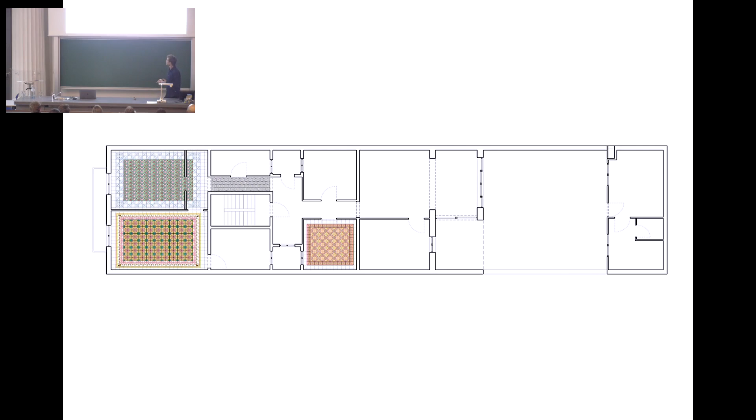We had another approach for that. Here, one of our first commissions, we decided to open the space and improve the relation between the courtyard and the street. So we opened all this by opening these walls, opened this structure, and tried to connect this place - the workshop. This is a place for a musician who used to work and live in the same place. So we tried to improve the idea of working and having the connection with the street. It's not only the visual connection, it's the air - air facilities and cross ventilation, and the idea of living in the exterior, which you can do in Barcelona from March until October or November.

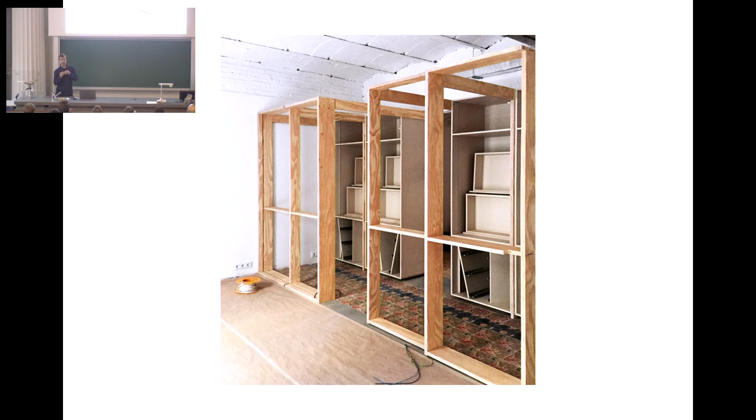Actually, one of the most difficult seasons is summer, so we did these kinds of operations. We started by opening this new courtyard, creating a sequence of different spaces which were not defined by a domestic program. We just proposed a collection of rooms linked to the exterior spaces, so from the interior we could see the exterior, see the street. Then we introduced all the new program of the house - storage, or even this new structure for a pergola and a staircase to go up to the garden on the roof.

We propose that as a piece of furniture, a different element with different material from the pre-existent - this idea of permeability, of sequence, of living in an intermediate place between the exterior, the street, and the courtyard. These are some pictures of the place. Also greenery and vegetation is very important for us because it helps reduce temperature, creates shadows, creates a healthy comfort environment. And this idea of placing the kitchen - it's maybe the only thing we usually place that doesn't move. The rest of the house is just an open space.

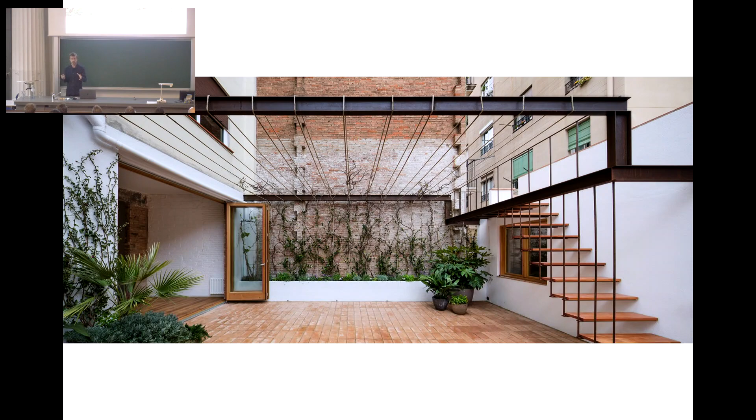So as I mentioned, the most important room for us is this - the exterior room that we improve. We always try to improve these spaces. In this case, with a really light structure, with ropes and vegetation, that has a green cover in summer, and in winter it permits the sun to go through.

With the same idea of subtracting and adding, we did quite a lot of competitions these last years, and we were quite lucky that we won some competitions.

We are actually building some of the work that we have won over the last years. This one was in the center of Barcelona, in the Gothic quarter, the Gothic district. This place here was a former house, a common housing complex, but it was catalogued as heritage, because it was in front of this Josep Lluís Sert health center. This is a very important architect, Josep Lluís Sert, a Catalan architect. And this place, since it was in front of the famous building, it was catalogued.

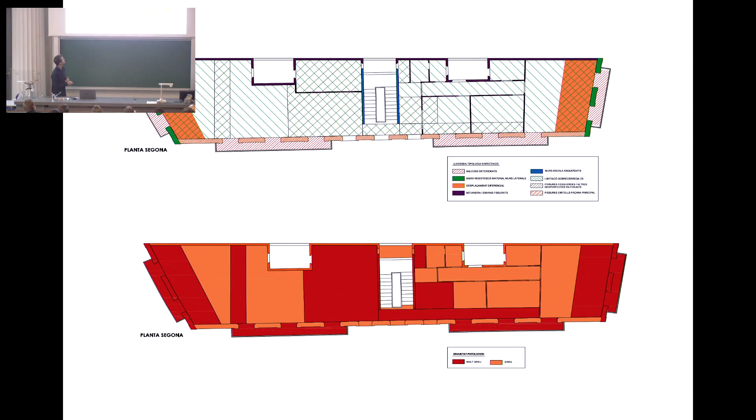But on the brief of the competition, they said that this building should be demolished and it should be a new building for a music school, but we had to preserve the main facade. For us, it was something stupid, because if we have to demolish a building and have to maintain a facade like a landmark, we don't really think that's heritage, we don't think that's a good approach. It doesn't make any sense to just destroy the building and keep one wall, which is quite tall, quite difficult. You need a structure for that purpose. So we were really critical with the brief of the competition.

They gave us all these plannings that said this place was in danger, in a bad situation and was going to be demolished, so it had no kind of interest. But then we proposed to maintain the 3 facades, which explained the former volume of the housing, and then we decided to maintain some of the original structures in order to keep those 3 facades.

Instead of demolishing the whole building and just maintaining the principal facade, we proposed a singular void in the central part, in order to introduce new facilities - staircase, elevator, bathrooms, etc. So at the end, we proposed to combine 2 structures: the old structure, with Catalan vault, ceramics, and metal beams, etc.

And then we proposed to introduce a wooden structure, a CLT structure, which is a light structure. It doesn't need to increase the foundations of the building, which in Barcelona is a good thing, because in the Gothic center we have a lot of archaeology, so it's important to think about the weight of the buildings.

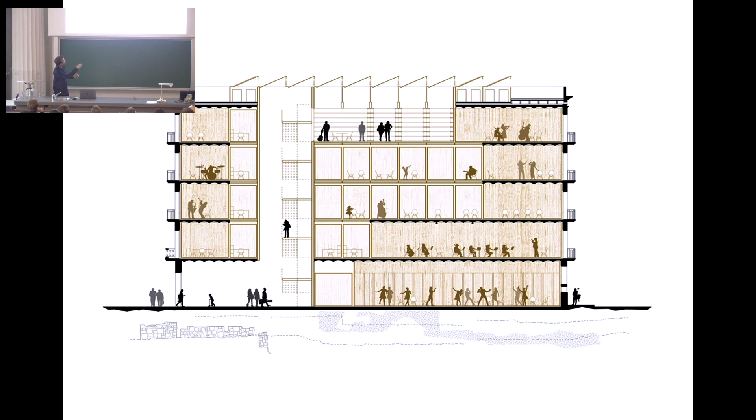And we decided to remove the central part, and we proposed all these small boxes that were maybe just supporting this program for a music school, for small classrooms, but in the future they could be taken out, and then we could have these big spaces. This was the main idea of the project.

Of course, we had this new staircase that works as a courtyard, and it provides the lighting, the air, the cross ventilation. And then another strategy, the second strategy, was to separate a little bit from the street, because since it was a music school in a very popular neighborhood, we decided to locate the rooms in this intermediate space.

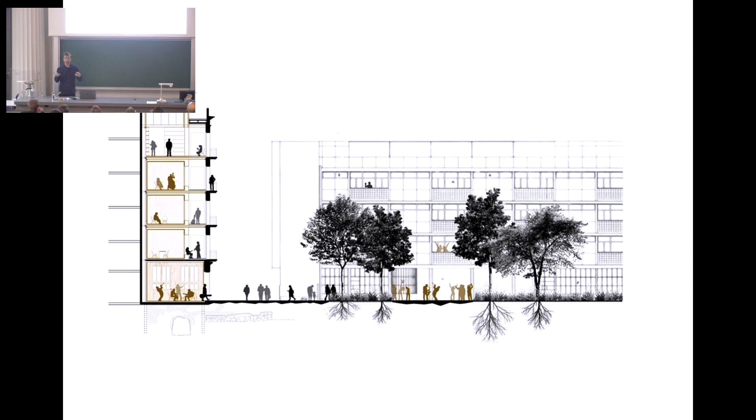We separated a little bit from the neighbors in order to not impact the former structure, and to have some space for facilities. And then this space works as a gallery, as a common space, as a street, in every floor.

So with this strategy of box in a box, putting new wooden boxes inside a ceramic box, we obtain these in-between spaces that really transform the building, because they transform a single room into a public space in the building. Of course, reusing the pavement and recovering the walls, the bricks, etc.

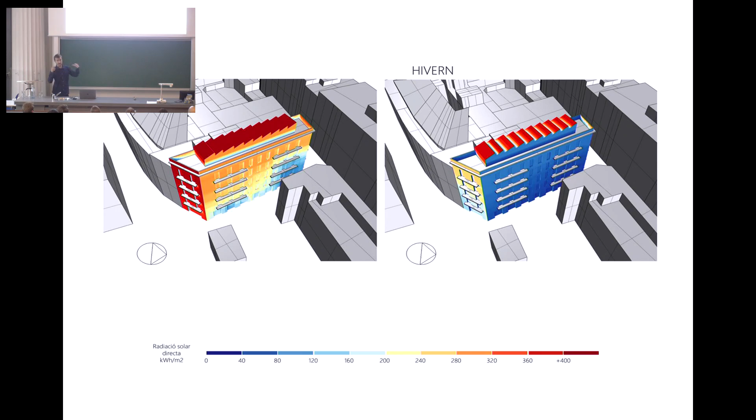And then we are very conscious of the heating and the temperature in summer and in winter, in this Gothic Raval - there are very narrow streets. You almost cannot have heating in winter. So we proposed to have a heating roof, like a skylight, a big skylight, in order to get all this sun heating in winter, to reduce the need of heating in the school.

And in summer we shade these glasses, we shade the skylights. And then since this place is hotter than this one, air goes up, for thermodynamic logic. So this strategy helps to improve the bioclimatic behavior of the building.

And these are some images of this top floor. We did a trick here, because this was supposed to be a library, but in Barcelona, in Spain, the regulations are really hard.

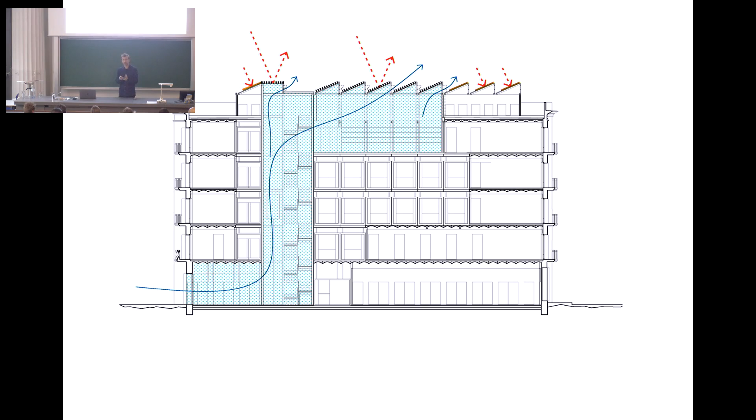So a library needs air conditioning and a lot of things, and we decided not to call that a library, but a place to read. We just change names so they cannot object, because a place to read is nothing—it's a place where you have books and you can read, but then we could improve this as a bioclimatic space. We really like to do that kind of tricks.

This is the first phase of the building. We won a competition and we were really happy because they appreciated this idea of saving the building, which was going to be demolished. The first phase, as happens a lot in Barcelona—you win a competition, three years later you deliver the project, three years later, if you're lucky, you start the work, and maybe three years later you finish it. So it takes about 6, 7, 8, 9 years. You have to be very patient in Barcelona if you want to be an architect.

But we have a problem with squatters in Barcelona, because we have a lot of empty buildings, and if squatters get inside and spend 1 or 2 days—I think it's 48 hours—there's no law that can get them out. So for public buildings it's a real issue. Barcelona municipality does an operation called an inhabilitation process, taking out some parts of the building to prepare it for future works. So this project is about taking out these slabs and parts of the building, but we could maintain the main structures and facades we imagined in the competition.

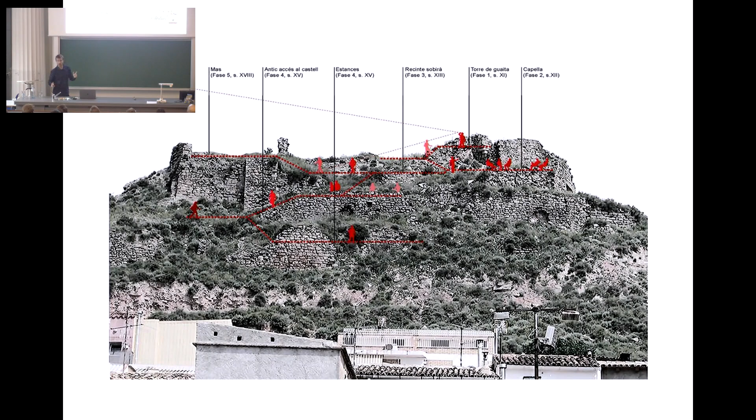Two years later, in 2017, we had the first commission to do the first intervention in this castle. We had a great budget of 30,000 euros—not our salary, for the work. So for 30,000 euros we had to do something.

We thought, okay, we're going to work with the archaeologist, not after the archaeologist—usually the archaeologists go first, do the earth movement, find the structures, and then the architect comes. We decided to work with the archaeologist and reuse all the material, the earth, found in the excavation. So while the archaeologists were recovering the castle, we were constructing platforms to improve accessibility to the castle.

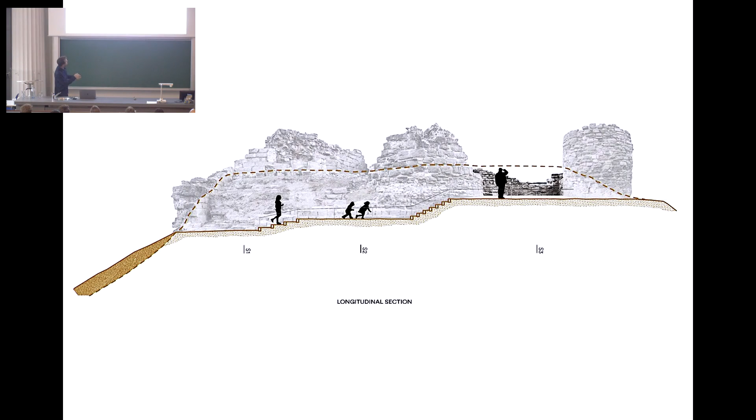It was really fun because there was no residual material—we didn't drop anything. We just took out the earth and put it there. We did this excavation and created a passage to the topmost point of Jorba's castle, with the idea of recovering the point of view.

Because for us, recovering heritage is not recovering a shape, a form, or a material—it's recovering an experience. And this experience is a place, like a viewpoint, a place to look at the territory.

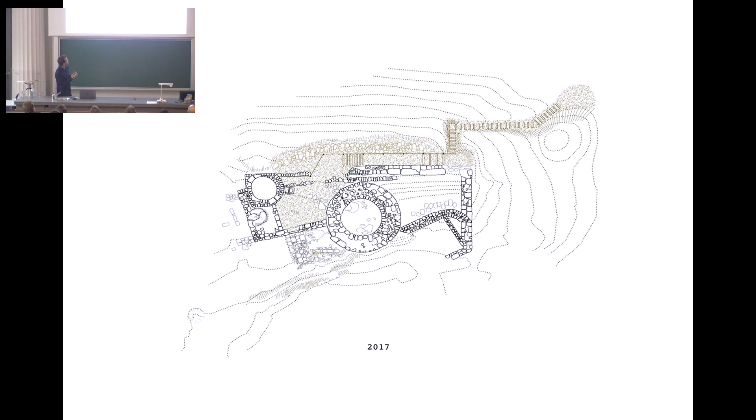All these rocks are material we found in the excavation that we left there for the future. So with these high-tech details, and with a lot of energy and a lot of visits, trying to engage the constructor and the promoter and everyone, finally we could do this. It was really minimal work, but for us it's one of our favorite projects, because at the end we reached almost the first image. It was almost invisible, the intervention—just a staircase to allow people to get into the top part.

So at the end there are five parts. The first parts are almost underground, only 60 centimeters. Then we go up, we face the castle, we turn around, and it amplifies a little bit. Then we go up and finish here. We finished here in 2017.

Two or three years later, we had the opportunity to continue this project. This is interesting because we did this master plan in 2015, then in 2017 we did this first intervention, and two or three years later we had the opportunity to continue this idea. So at the end, this idea of working in phases helps us to think.

It helps us improve things and understand the meaning of time in our work, in terms of this heritage. In this case we were surprised because in this excavation we found a structure of an old church. There were some important drawings from the 17th century, and the archaeologists told us there were interesting works here—they told us to think about a structure to keep this place from water.

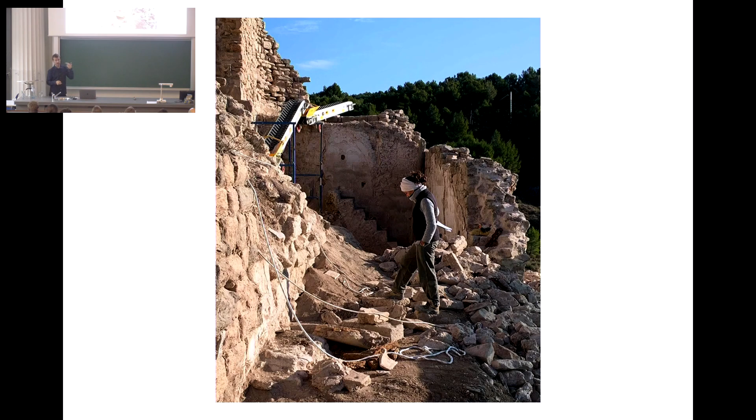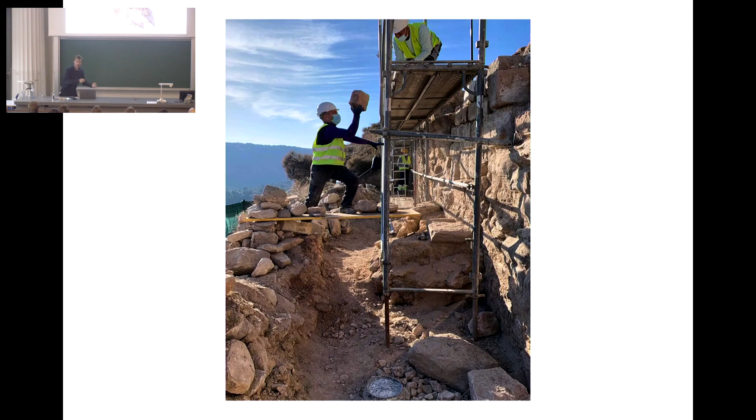We had to redo the whole project because we had to maintain the same budget—we didn't have more money—and we had to invent a roof to try to preserve this place from water. So we decided to work again with the materials of the place, with rocks, with earth. We did this cyclopean wall to stay within budget and not waste time or effort placing things. We just replaced the rocks. We did this wall in order to do this topography.

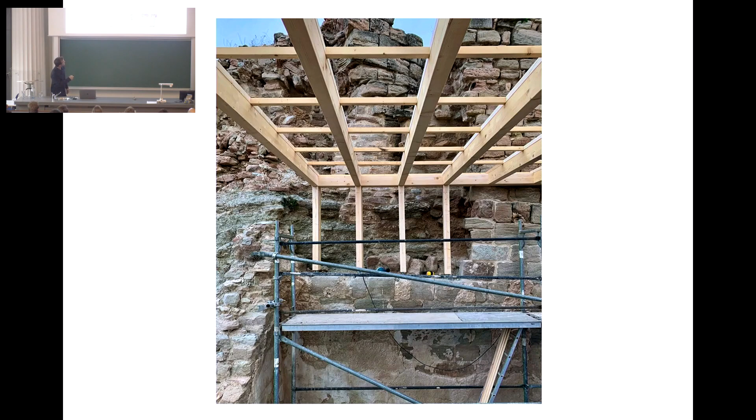Then we proposed this light cover, this light structure that is reversible. In the future, if they don't like it or need something else, it can be taken out because it almost doesn't touch the former structure, but it helps to finish this second phase. Actually, it really finishes our first idea about this transition through history.

This structure is also a landmark—something that from the distance, you recognize that something has happened there. Then you see the former height of the castle. And of course, it is a new layer, a new layer that explains this new intervention, and it was really precise work.

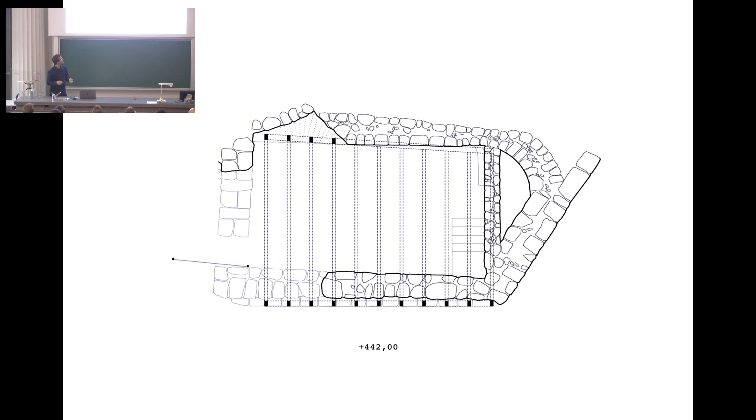By taking care of all these wooden beams in place, we then placed this polycarbonate cover because we didn't have any artificial light, so we had to work with a translucent material in order to have light inside to see the paintings and all this material. This place is something that we found and then transformed—so it's a new place, another place.

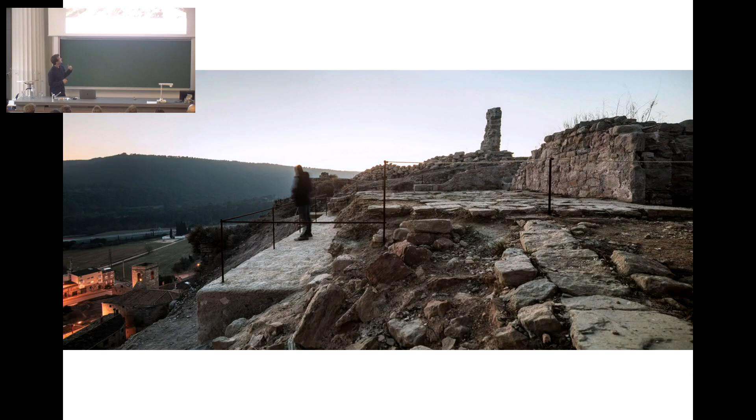This is the detail of the pillars that they don't touch, the former foundation. For us, the most important space in this project is this one, because at the end we finally achieved our goal, which was to relink history with the landscape, to recover this point of view.

The second group of projects deals with this idea of climate, or bioclimatic shelters as we call them. Of course all the projects could fit different categories, but this one will be fast because we've only been working on it for 2 or 3 weeks. It's quite new, but I wanted to share it because it's another kind of intervention, in a public space, a park, which was planted with pine trees in the 60s.

These trees are now old. This place is quite dry. We have a problem in Barcelona, it doesn't rain. So this place could really be a climatic shelter, but it doesn't work. So we won a competition to transform this place, to improve it as a climate refuge. This is a name they are using in Barcelona's metropolitan area for this kind of climate refuge.

Just improving the environmental condition of an existing place. So what we do here is understand the pre-existence, which was this road, a pedestrian road that was informal. Then we just placed a surface, a platform, through earth movement, and the most important thing is that we put a water pan here, in the lowest part of the topography, so all the water will come and drain here.

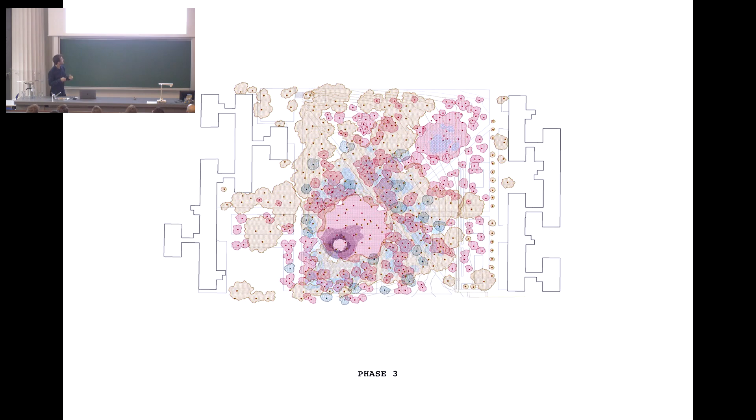And then we were going to plant some new species. This is like an evolution of the idea. Now we only have one kind of tree, these pines, so they always have the same kind of shadow all year. Since some of them are old, we propose a sequence of changing some trees and introducing diversity, biodiversity, and water, in order to improve the thermal conditions of this place, understanding that this could be a climate shelter.

But this project is also about understanding how to introduce a place into an existing space. And we're working lately with this idea of very defined geometric enclosures.

This project that Tina mentioned is one we're developing right now. It's under construction, it will end maybe in 3 or 4 months, hopefully. It's in Palma de Mallorca, really close to the airport, which is a problem acoustically, and close to a road, also a problem acoustically. The plot was a pretty bad plot, really hard. I don't know exactly why we entered this competition, because the conditions were horrible.

But this promoter is very interesting. If you saw the last sketch, it's Ibavi. I think it's one of the best promoters in Spain, maybe in Europe. It's a promoter really committed to recovering traditional materials.

These dwellings don't have any kind of heating system, zero. They are bioclimatic, because in Mallorca, in the Balearics, the weather is even better than in Barcelona or Catalonia. In summer it's a challenge, since they don't have air conditioning either, so they have nothing except hot water, nothing else. So this is an idea of reducing, of trying to go back to the main issues of life, of construction.

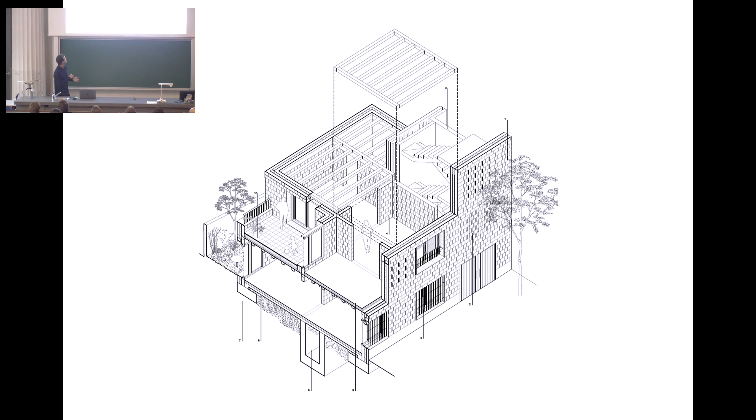With this idea of separating from the party walls and creating these things, all the dwellings had to open, had to have windows onto the street - this is not a regulation dimension for opening windows, we put that in for quality. We can use these patios, but we had to place all the dwellings on the street perimeter.

And then as the building grows, it fractions, and it allows this kind of terraces. We have 11 dwellings, 5 on the ground floor, and this is quite interesting because these dwellings come like this, and then like this and this one - some kind of this shape.

And then they have this staircase, which is a private staircase for everyone, and it works again as a heat - like a chimney - and of course it gets some heat from the good orientation.

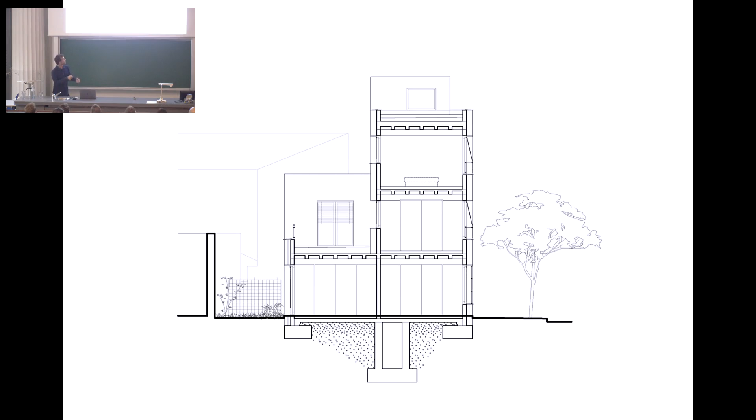And then we had this thing because the plot was really bad, and we had to put some kind of inside gallery to place facilities, and we use this to move cool air, to exchange the air of the dwellings through this underground corridor.

The dwellings are quite different. This is the typical one on the ground floor, which is very simple - we have all the facilities here and then this courtyard.

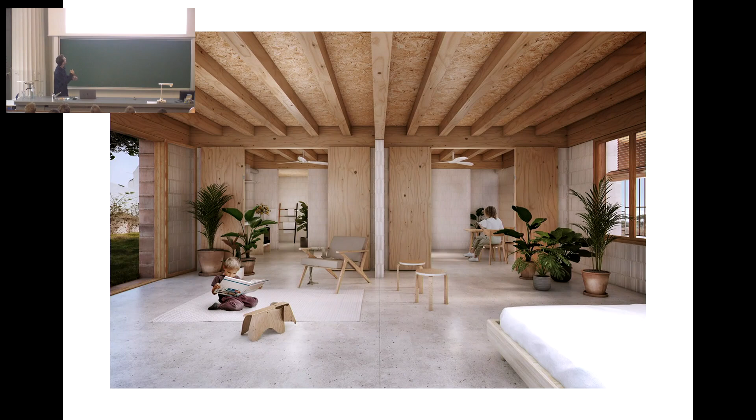But most of them are different because they are adapting to the place, to the pre-existence, and they have different situations like terraces - this one is quite big, has cross ventilation. And these are some pictures of the construction.

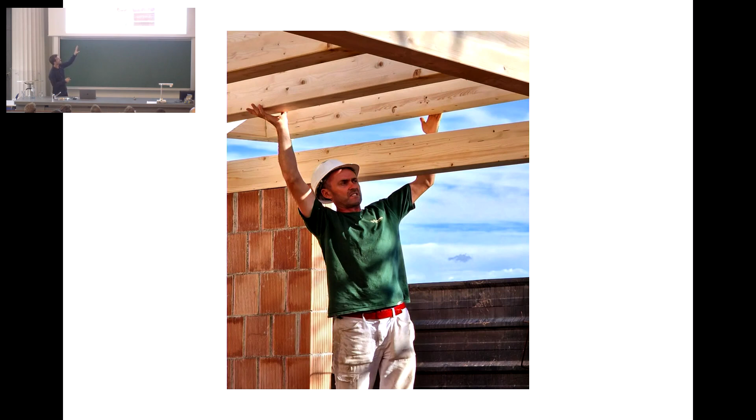Using this local brick, always trying to improve this idea of the house we saw at the beginning - this idea of cross ventilation, cross views, and prefabricated wooden slabs, which help save time. So this idea of working and improving the two technologies together.

Without any kind of support - just the wood supporting wood, no metal things, nothing, just by its own weight.

And of course, one of the dwellings will have this surprise in the patio - they will have this rock, which I think is really nice, really interesting, because it's geological history. It's quite narrow, but I think they will find a good place to put a table, and they will start a good relation with this rock and with the history of the place.

Another project, finishing this second part. It's a single family house in the north of Barcelona, near the place that we went to see to start the journey - the Turó de la Rovira, in these bunkers. This is the Tres Turons, Turó de la Rovira.

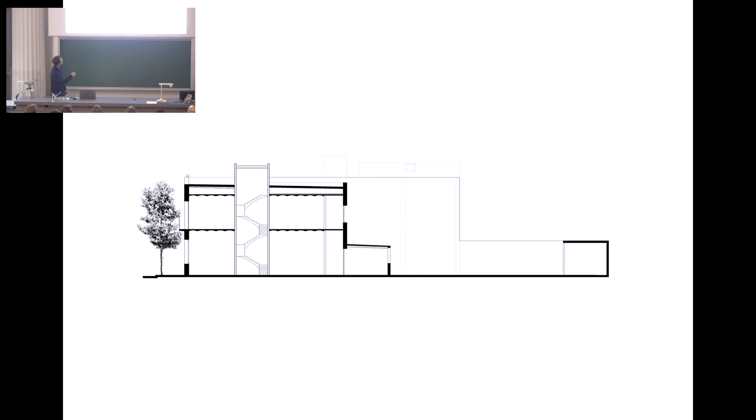This was a former house from the beginning of the 20th century, which had - again - this facade was catalogued. But the house had a lot of renovations and a lot of issues that weren't quite interesting.

So we decided on this strategy: remove some part of the house, the newer or latest part of it, and reuse all this material as a sustainable draining material in the courtyard, and introduce a new wooden structure in order to increase the surface area.

And in between the two structures - the old, heavy, inertia structure, and the light wooden structure - we had a patio, a vertical courtyard. We placed the staircase there, and all the services and facilities, the kitchen and bathrooms. So at the end, this is the idea of combining the past and the future, the past and the present, and the joint.

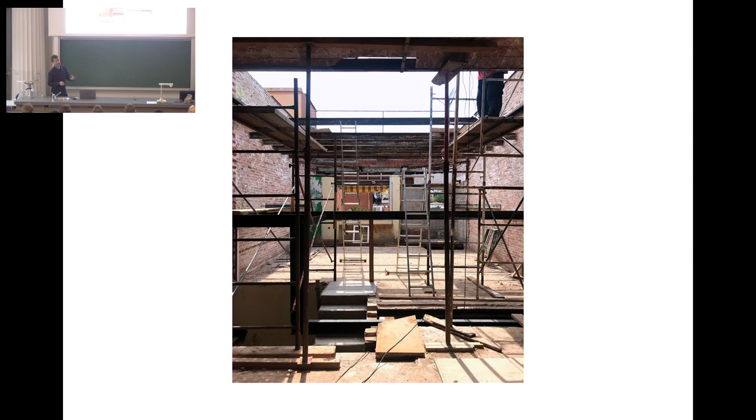It's an empty space that helps to improve the bioclimatic conditions of the house. This hall works like a patio, helping all rooms have cross ventilation, which is very important in Barcelona because in summer it's hot with a lot of humidity. Opening here and here, all rooms get cross ventilation. When this place is open, everything works as one singular, big space.

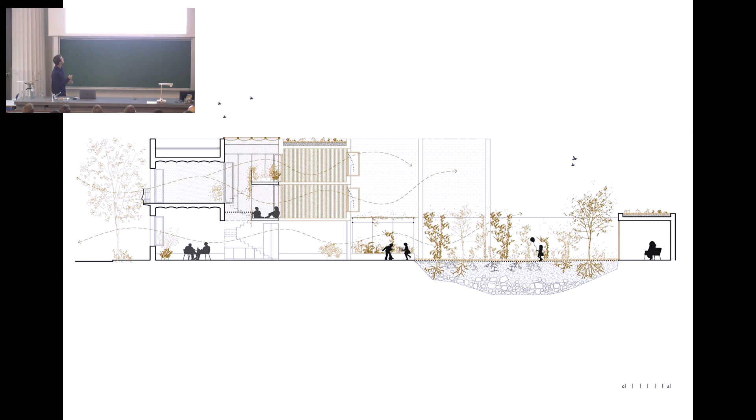This idea of vegetation works again as a climate conditioner, like a climate pergola. Of course, the passage of time always improves the projects. Going up, taking care of this idea of ventilation, like an Egyptian house that works vertically, we have this.

This place is like a winter garden, a glass house inside the house. In winter we can close it and it works like a heat condenser, but in summer we open it and everything works as a single space.

The new rooms, which we had to add on this new floor in order to achieve the surface area and the program, we needed more rooms. They are made of wood, so as not to increase the weight of the house.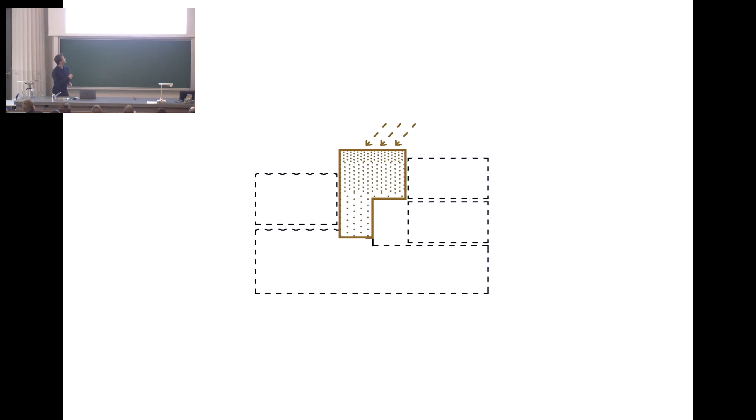This idea of understanding the two situations of the house: in winter we have these compact rooms, in summer we have all this open situation. Then there's this greenhouse that works like a greenhouse in winter, and in summer it works like a chimney.

Let's move to the third part of the lecture, which is another scale, meaning linking landscapes as well, these ideas of understanding. As you see, all the projects are about connecting spaces, connecting climates, connecting exterior and interior, connecting past and future. This is a project we are developing at this moment.

Our group visited it from the exterior, so we couldn't see anything, but now we have improved the works a little bit. This was a competition we won two years ago. It was a really funny competition because it was for the building of a fireman practice tower. It's a strange typology.

Firemen in Catalonia, since there are a lot of fires, need a tower that simulates different parts of different buildings. So they need a lot of different staircases, balconies, and different kinds of windows. They climb, they jump - this is a very singular typology.

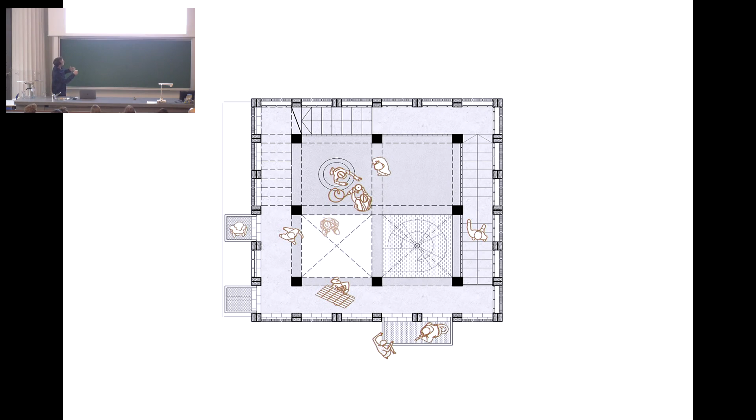So in this case, we propose this heavy structure because they need it for the activity. And with this section, which is really nice, really interesting, really crazy, there's a lot of dangers inside the building. Like 3 stories, jumping, climbing here, going down, like a well inside here, okay?

It's a really interesting project. Actually we won the competition and now we are building this piece. And we had some problems, some surprises, because in the competition we didn't have this information. They told us, no, let's go make a tower. And here we had a lot of work to improve the foundations of this tower. So that's a trick they didn't tell us at the beginning.

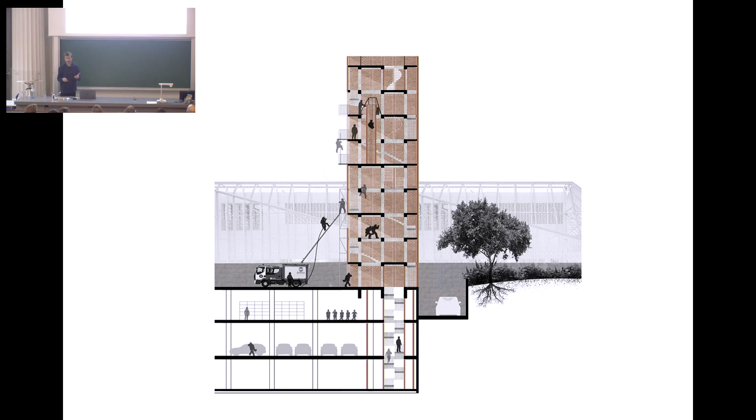But I think we have improved that, and now we are already in the second floor. So we are okay, and it's going up. It's very nice because you can see the future of this, the future spaces and this vertical connection, all these small corridors.

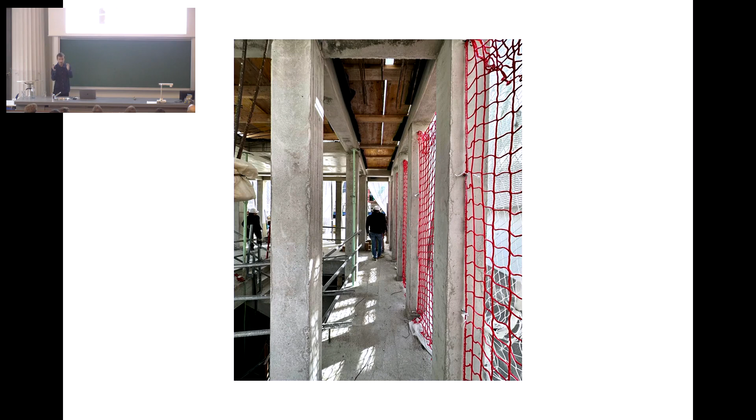The firemen are really happy when they go to the site work. They think it really relates to the buildings in Barcelona. In Barcelona, you have buildings in the Gothic center which are very small, with very small corridors, and then big spaces in Eixample. So this tower creates all this kind of situation. It's a very interesting project.

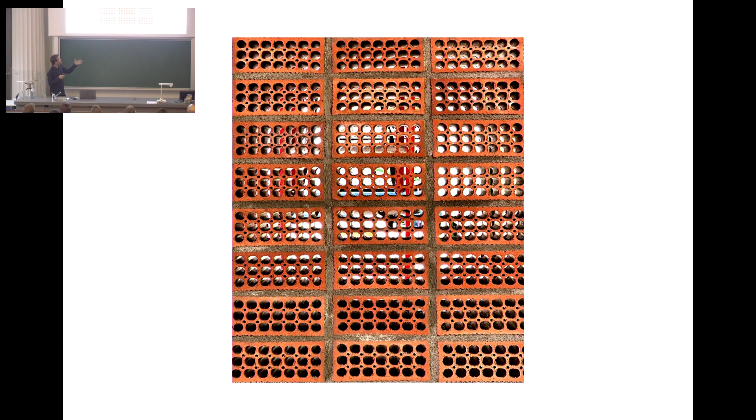This is the facade. We work with bricks, and we put them on this side in order to have wind, ventilation, all year. Because at the end, this building won't have any kind of installation, any heating or cooling, nothing. And the firemen wear a lot of clothes in summer. So we needed a building which breathes, which ventilates the whole year.

Now, this is a project related to our course that we are doing with Elisabetta, water trails. Actually this is a water trail, Rec Comtal. This project nowadays, if you look at the newspapers in Barcelona, is very important because we have a problem with dry season. It didn't rain in Barcelona for the last 3 or 4 months. And ACA, the agency of water in Catalonia, is thinking about taking the water from this Rec Comtal to get like a reserve of water.

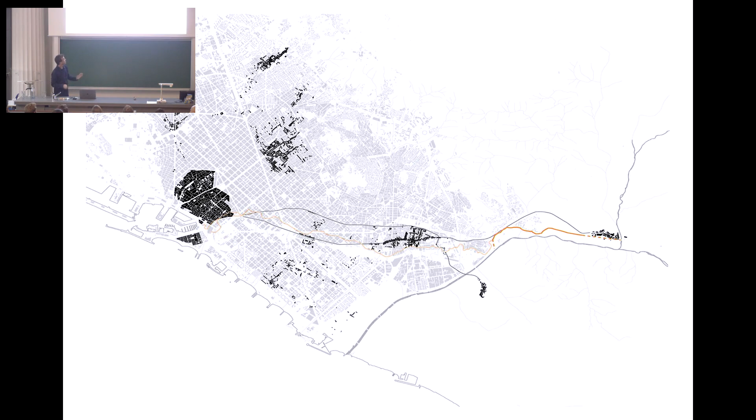In 2013, we won our first Europan in Barcelona. Europan is a competition for young architects. Usually when you win, you won't get any kind of commission nowadays. Formerly you'd get commissions to build something, but not nowadays, at least in Catalonia, in Barcelona.

When we win, we have won 3 Europans, we didn't get any kind of commission from the competition. But in this case, we were asked to think about doing something in Rec Comtal. That was our prize for Europan after winning the competition.

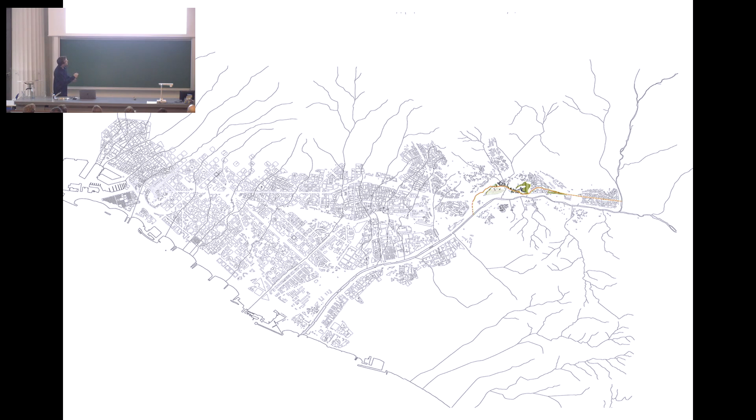We started to analyze Rec Comtal, and we decided that Rec Comtal was not only about one place, one intervention here—it should be an intervention for the whole city. We explained that Rec Comtal is not an intervention just to recover an archaeological site or a place. We have to recover Rec Comtal as a heritage resource: water. We have to reintroduce water in the city, or at least reintroduce permeable conditions in the public space.

We localized 25 possible situations at the beginning where we could introduce these kinds of strategic environmental conditions, crossed by these water streams. This was in 2015, almost 8 years ago.

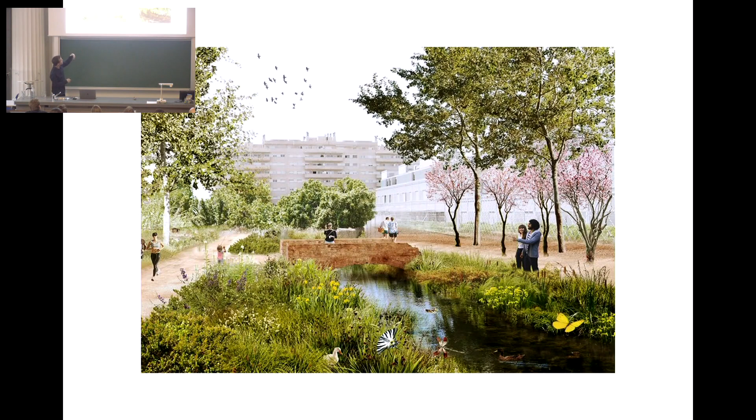So we have these different situations. Where we still have water, we can improve conditions, making a nice place with animals. Where we already don't have water but still have the trace, we could improve this as just a permeable trace. And in the center of Barcelona, maybe it's only pavement, but pavement allows water.

So we propose this kind of strategy to create continuity through Rec Comtal, allowing people to cross through all these neighborhoods and reconnect the center of Barcelona with Vallbona, the poorest neighborhood in the city. No one cared about Vallbona. Nowadays, yes, because of Rec Comtal, but it's almost outside the city.

So this was like the master plan. One thing about our studio is that sometimes we invent a lot of projects, we invent a lot of work. When we win a competition, we change the idea of the competition. When we have a commission, we try to change the commission. And I don't know why, but we ended up finally receiving this commission for a master plan.

We were only supposed to do a commission for a single place, like a park, and then we were asked to do this master plan. This master plan took almost 5 years. Then last year, we had the first commission to do an intervention in Rec Comtal itself—an intervention exactly in the Rec Comtal.

Rec Comtal, in this place, is like an abandoned, residual space. People were even swimming here, and some kids got trapped inside, causing some social issues. So they asked us to think about some kind of intervention that would keep people from the water, in order to preserve it, but also for security reasons.

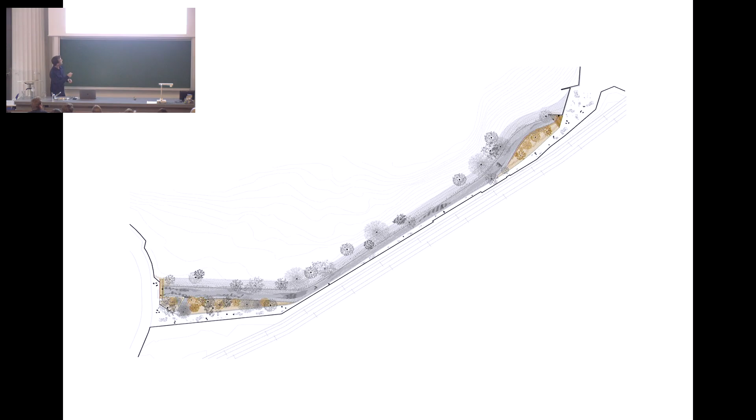So we decided to work with the idea of 2 points that served as a pilot intervention for the rest of Rec Comtal—2 points that were like landscape points, also like viewpoints. These were the places where you could see the water, standing in front of it, outside the water, but still seeing it.

Along this road, we planted a lot of vegetation to improve the quality of the water, to make shadow, and to reduce the temperature. So these are the points where you can be in touch or connect with the water, and the rest is just nature. We have to start thinking that people can't be everywhere—we have to separate nature, define which is the place for people and which is the place for nature, because nature, at the end, is our future.

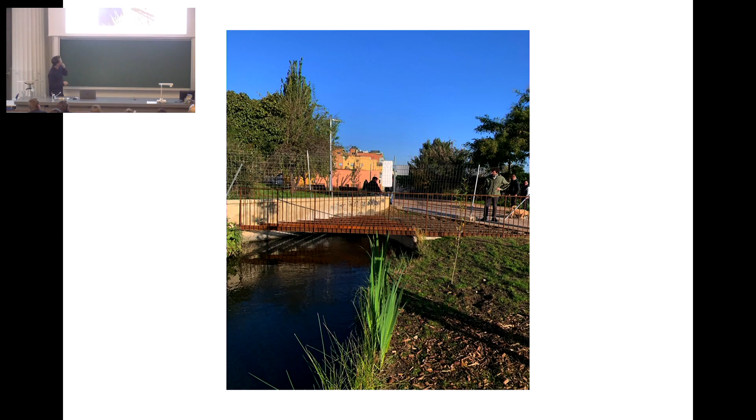People really go there, and they become familiarized with these new points of Rec Comtal. On the other side, we had existing infrastructure overlaid on Rec Comtal, so we decided to place our structure as another overlay, in front of and over this existing structure, like a balcony over Rec Comtal.

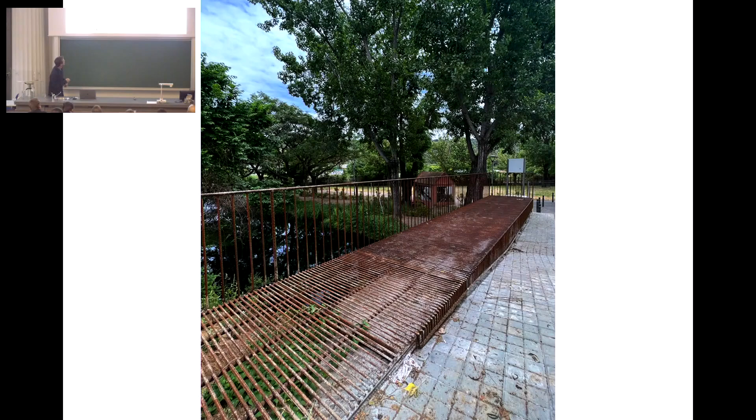The commission was for a handrail, and we proposed this idea of a balcony instead. It's related to the context, and you can enjoy the water and the biodiversity of the place.

These are pictures from last Sunday when I went with my family, and this place is now fantastic. We planted species here that keep people from the water, and we introduced some new species of fish, working with biologists and specialists. We don't know anything about fish, we know about bricks, but I think the fish is more interesting than the brick.

So it's quite nice to see that the work, one year or some months later, is starting to have its own life.

Now this project, the Tower of Merola - I think I've already explained the main ideas of our work. This project has the same idea as the lookouts in Rec Comtal, but with another condition.

The condition is that this was an old tower from the 13th century, with the highest catalog definition of heritage in Spain. In 2015 it was about to fall down - it had suffered a lot of earthquakes, and actually one year later, in 2016, it was about to disappear.

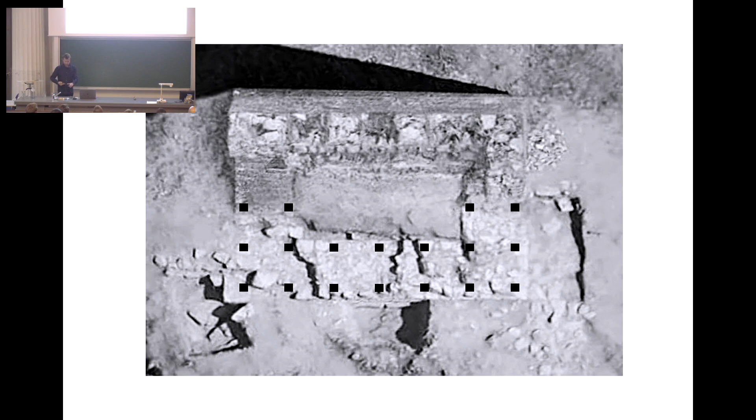We saw the plan of the tower, which is very small, 3 by 5 meters. We proposed to recover the structure with 14-centimeter wooden pillars, columns, that would recover the original trace of the tower, and we were allowed to place a staircase for maintenance reasons.

We said it was for maintenance reasons, but the truth is it was for tourist visits and experience, not just to climb to the high part.

So this tower again follows the same idea as the other projects: the pre-existence and the new structure, a light structure using another technique. In the middle there's a void space where we place a staircase.

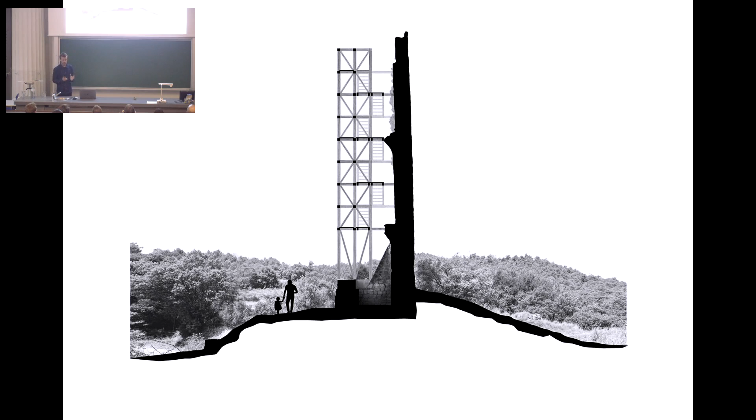We wanted to maintain this idea of the tower, of the ruin, because it was really powerful, so we didn't want to reconstruct it. We wanted to add another structure which is clearly different but still related - related maybe to the original levels, but using another technique.

We had to do all this work of placing and overlaying these two structures, which was very interesting - taking a structure from the 13th century and adding another very clear, great structure that really matches everything. So when they built this originally, they knew what they were doing.

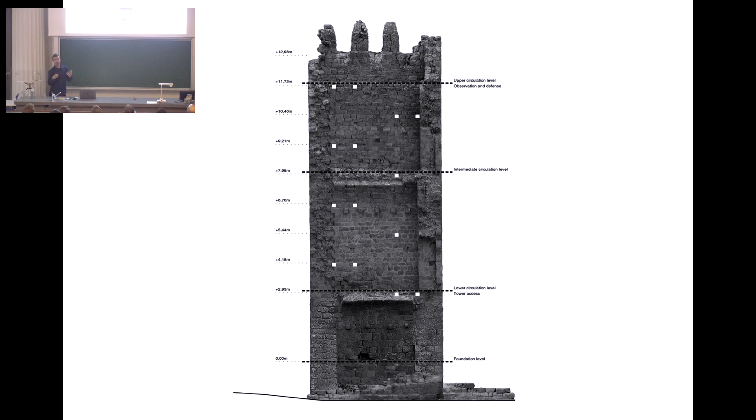We placed the staircase inside, and we have 14 points that help stabilize between the two structures. Of course, if there's another earthquake, maybe everything will fall down, but in terms of wind, I think we are safe at this moment.

For us, recovering the tower was not only about the monument itself, it was the whole place - the experience of getting through the tower, getting up, and getting linked to the landscape. This is the most important part of the project.

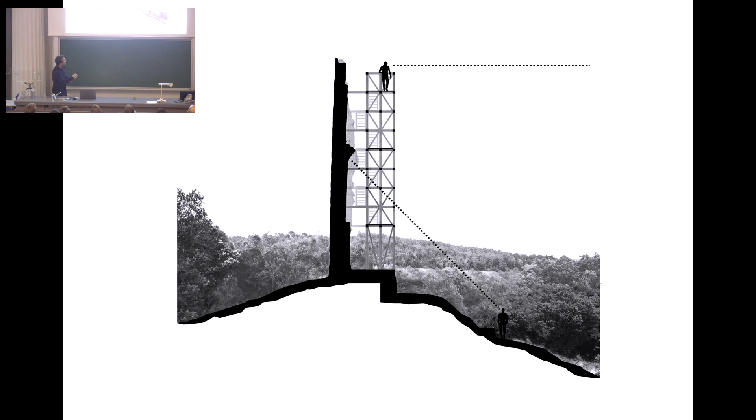And again, we wanted to recover and maintain the original surface, and we wanted to maintain this vision from the exterior. These are some images of the process.

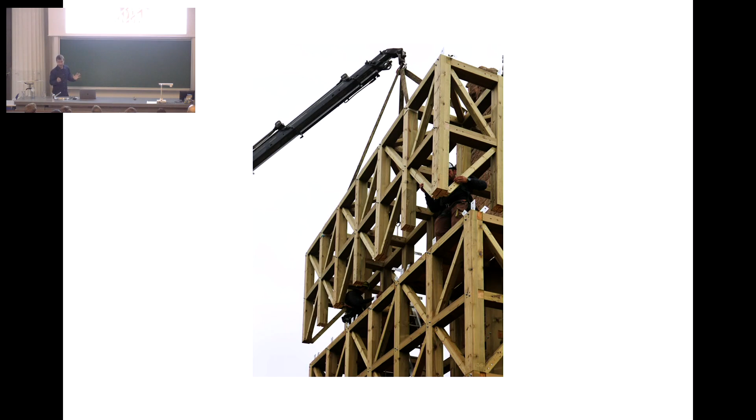I'll pass through quite fast since we have to end the lecture soon. But it was really interesting because of this combination of the prefabricated structure and working with a pre-existing structure. We were quite lucky because everything matched at the end—it was really amazing. We didn't have a measured survey, just a drone vision, and we drew these plans with CAD, and everything matched. We reached the original levels, and this is an image of the work.

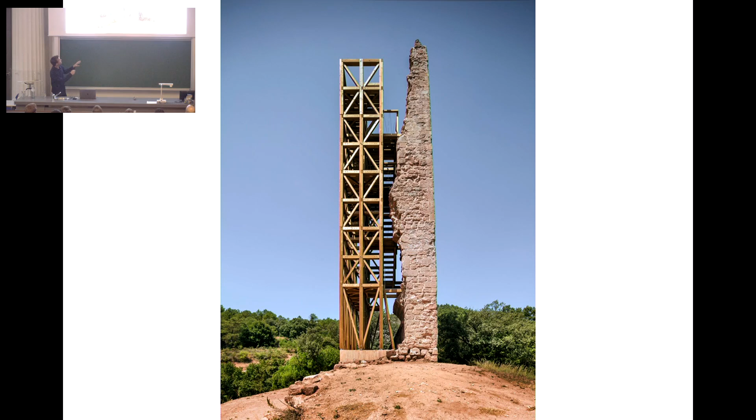As you see, there's clearly this break here, and then you see the staircase. It's really transparent, really permeable.

We left all the material that we found in the excavation here, to make a border for the intervention. We didn't want to waste this material. This is the original material of the tower, so it explains the demolition—it's nice to have it shown.

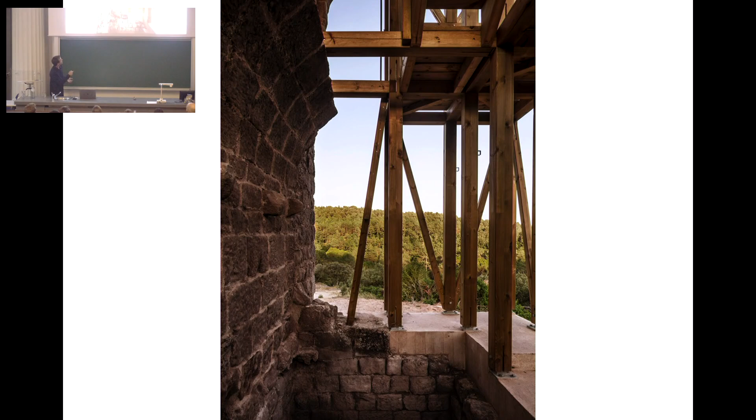And then we go up. This is very important because we made the same dimensions as the original stone wall, but with a very light column, so we can be inside the former wall. This is a very powerful experience—being inside this empty space where there was a stone wall, a thousand years ago.

And then there's this relation between all these landmarks that relate history with landscape—this idea of the staircase, that you have a physical connection with the tower. We believe that you have to touch heritage. Heritage is not something you just see, like in a museum. Heritage is something you have to live, something you have to touch and experience. So for us, it was very important to touch this tower.

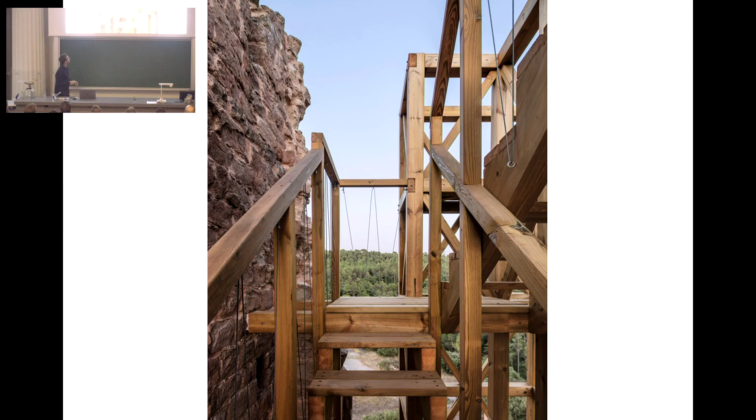And then we go to the top floor, and we finally reach this view, which is the most important image of the project.

When architectural interventions happen to be rooted in the landscape and in life, it's really gratifying. The last part of the lecture is about the future—another future.

Three projects that explain the idea of future, of being permanently ephemeral. Why? Because with all these projects, we didn't know what was going to happen in the future—things changed and we had to improvise. This is a competition we won two years ago, which we're developing right now.

This is a competition for a temporary market in Barcelona. In Barcelona, when historical markets are being refurbished, they relocate all the food stores into a temporary structure. This temporary structure is usually just replaced when it finishes its life.

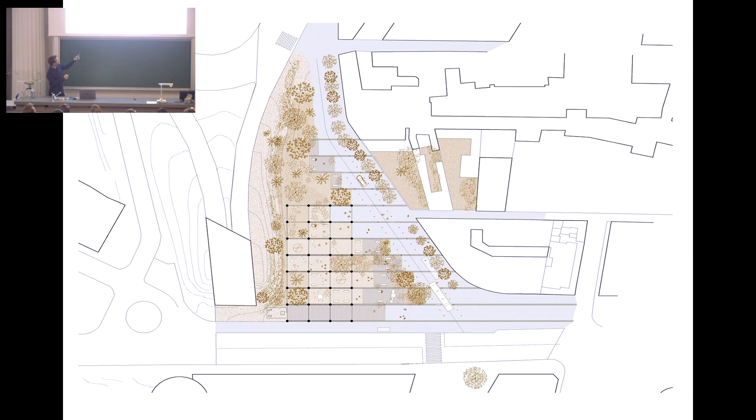So we worked with two structures: a wooden structure that would be the roof for this market, and then everything needed for logistics, storage, offices, etc. But for us, the project is this structure—it's not the market, it's this structure. So now we are building this, but we're thinking that in the future, hopefully, we'll keep this structure.

So we'd have another climate shelter, in the Horta district. This idea of thinking further than what we are asked in a competition or commission—with this idea, with this attitude, we faced this project.

This project is actually the first competition we won in Barcelona, in 2017. We were very young. We won this competition and thought we were going to be famous or rich. Nothing, of course—of course.

But we were very young, and it was a trap. In Barcelona, the municipality is a trap—you win a competition, and they keep you five or six years drawing, and then nothing happens.

And what happened here? This place is in Vallcarca. Vallcarca is a very interesting neighborhood in Barcelona, at the top of the hill, almost at Parc Güell. It was a former second-residence house with a lot of gardens and topography, very interesting. In 1911, a new connection, a new infrastructure connecting Putxet with Vallcarca, started to transform the neighborhood.

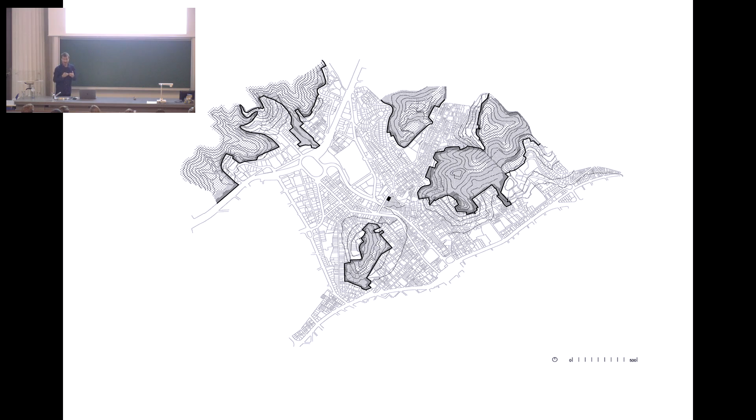It started to transform, as you see, this connection that is interesting in terms of urbanism. It's the beginning of the idea of losing the water in Rec Comtal, the idea of connection through mobility, through cars. But look at what happened here: this house from the beginning of the 20th century was trapped, buried by this infrastructure, which also created some problems between the connections of the different streets in Vallcarca.

Now from this street to this one, there's a jump of 8 meters, so people have to make a detour to get up. The competition was only about trying to refurbish, to renovate this place and transform it into a social center. This was the competition, this was the place of the competition.

We didn't really like this street because it's a very small place for pedestrians, a lot of space for cars, and we didn't really like the entrance, the main entrance of this palace. We saw the project from the other side. I would recommend doing that, because you have to see things from the other side. We were the only ones in the competition who saw this opportunity.

We saw an opportunity to improve a connection between this point through the new intervention, in order to reconnect with the bridge. So we saw an opportunity to replace this wall, go through here, and then take advantage of this situation with the new building, that we proposed in the competition.

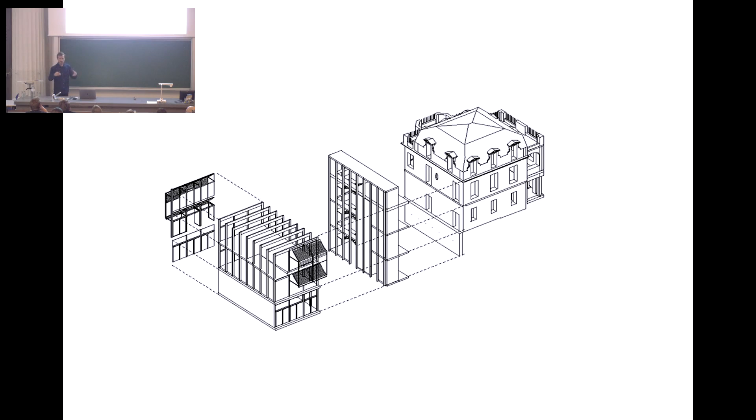With this drawing, we won the competition, and we developed the project over 2 or 3 years. It was not a big project, but for us it was our first public project. The idea was the former house with bricks and stone, a lot of inertia, against an idea of a lighter structure with no specific program, just multi-purpose uses. And in the middle, again, the idea of connection—taking care of the layers, the history, and so on.

March 2020, we were about to start construction on the project. I don't know if you remember, there was a world pandemic, and we never started the project. Actually, they called us and said, okay, we have to relocate this investment to something else which is more urgent.

And now you have to do something with only 10% of the budget. You have to do something, we have to start, think about a first phase, do a demolition, do something, because we have a problem with the squatters. We don't want this house to be... we have to do something, please.

So we went to the office, to the studio, and thought, okay, we're going to improve the project. We didn't really like the project from 2017 because it was a collection of small rooms, air conditioned, heating—we don't like that kind of project anymore.

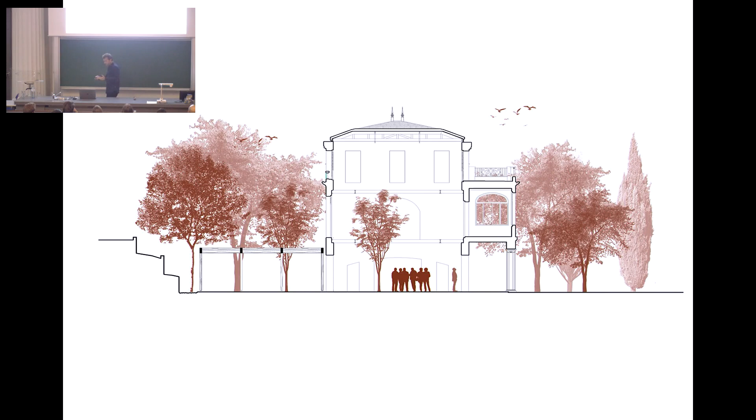So we go from the situation of the former building, the situation at the time of the competition, which as you see was very complicated, to this—this is the project. When we saw that, we said, okay, that's the project, let's do that. And then we did it. We started to deconstruct—we like to deconstruct.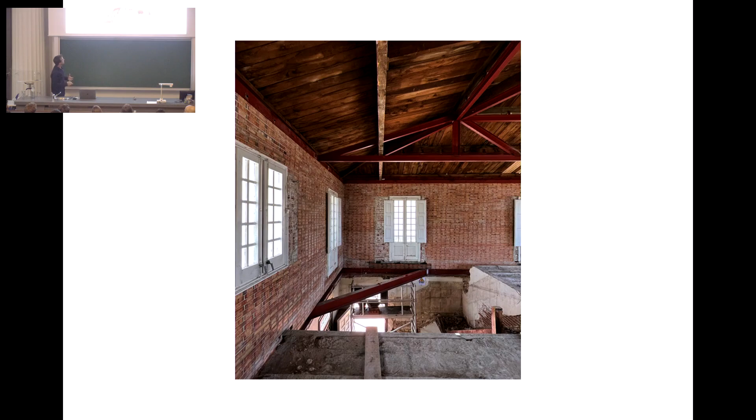We're just to uncover the whole place, to replace all these interior structures. Of course, we had to improve a new structure and improve all these new perimeter walls in order to have a great perimeter structure. This was a really interesting process, and the result is really powerful.

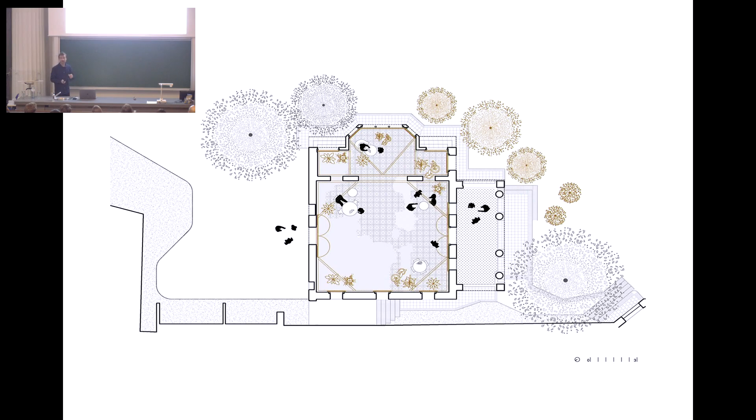We also recovered this porch as an exterior space. Everything is exterior, and this is the idea. This is what we call Canal Junyent 2.0, or space Canal Junyent, or post-pandemic temple. We have a lot of names for this project because we don't know how to call it, and that's important, because it's not a social center, it's not a garden, it's everything. Everyone can use it as they want.

So yeah, this is the idea and the scars of the project, and this is very nice. We recovered all this place, and then we put some fences here in order to keep some kind of security at night. So yeah, some images of possible occupations of this place.

Actually, now we are working on the improvement of the gardens. So in six months or something like that—we are very slow in Barcelona—but in six or seven months we will have this place with activity, I hope.

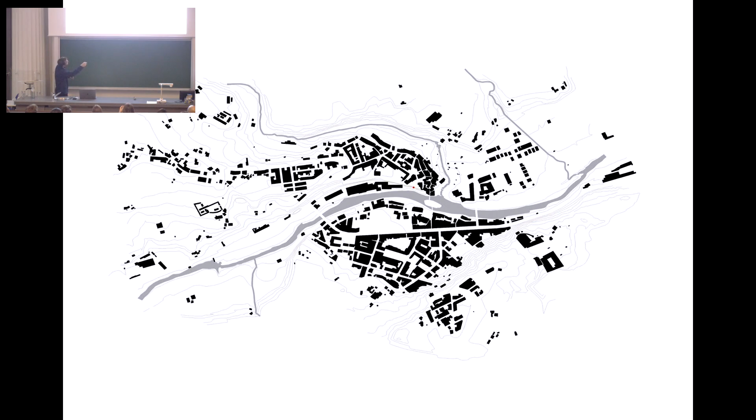This is some industry from the 19th century, and this is the modern part that was just connected with the main road. So this place, the old town of Gironella, was being depopulated because of accessibility problems. All the facilities, all the new buildings, were in this new part of Gironella. The old part was being used only like an amusement park—something beautiful, but without any kind of new uses.

So the mayor of Gironella asked us to study how to place a public elevator in this context. For us this was 2013, so it was also one of our first projects. It was a real chance, because a public elevator in this heritage context was quite difficult. Actually, the mayor wanted to have the elevator here, because this is his town hall, so he wanted it to be there with the elevator.

But we thought the opportunity of the elevator could achieve something else. Heritage, for us, is not only this monumental or medieval part. For us, this is also heritage—this is industrial heritage. Informal heritage is very important for us. And also this is heritage, the natural heritage.

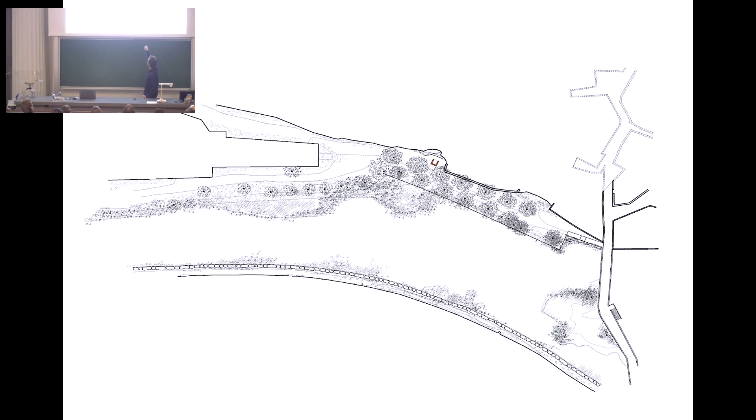So we proposed that was the place for the project. We relocated the elevator from this situation to this situation. With this movement, we provoke movement, we provoke dynamics, we provoke that people have to walk a little bit until here. So it reactivates all this space.

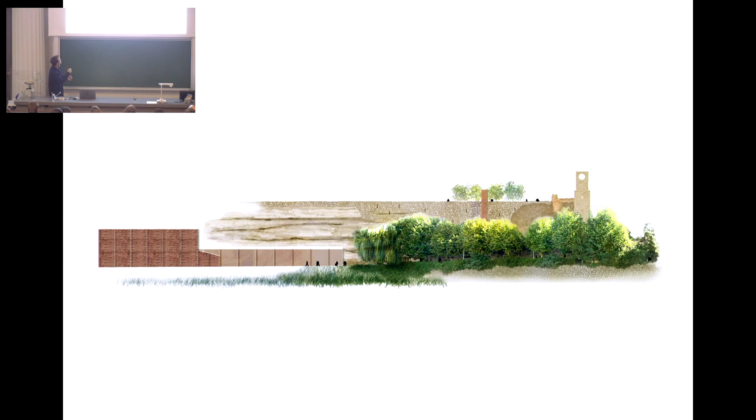Also, this situation was strategical because it was in the center of the big plaza, so it was the precise position for the new elevator. And the elevator connected again the different parts of history—there's a dialogue between the past and the more modern past. For us, this is the most important drawing, because the elevator should improve all this public space, these two public spaces. The elevator has two materials, and this section explains the change of material.

The first 8 meters are glassed facade, for security reasons and also to be more engaged to the context and to have more relation with the public space, and also the former wall. From the 8 meters to the top, 24 meters, are brick wall without any kind of maintenance.

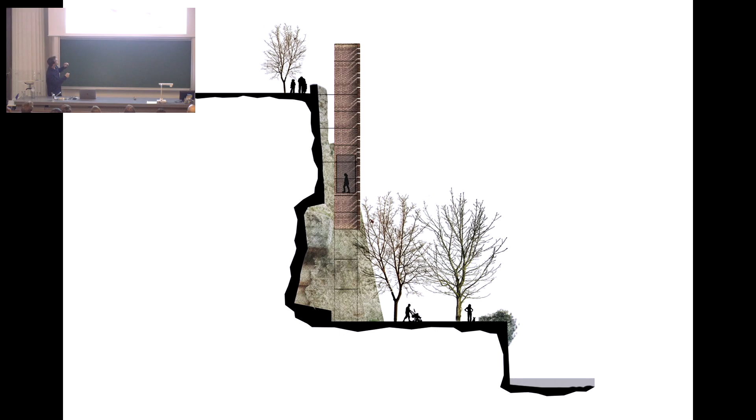We don't want to have a glass elevator because we thought it would be dirty, it would be hot, it would have a reflection from the other side. So we proposed this idea of having two materials and having this structure that wouldn't almost need any kind

of maintenance on all these years. Also, an important thing, the mayor wanted to have a viewpoint, a panoramic view. He told us, no, we want an elevator with a panoramic view. We told him, okay, the panoramic view you already have it from the top.

What we are going to do is open the elevator to the wall. So you're going to see the wall, which is important because you never have that close relation with this wall. And then, of course, when you arrive, you see the river, and from here you have the panoramic view that you wanted. You have everything, don't worry.

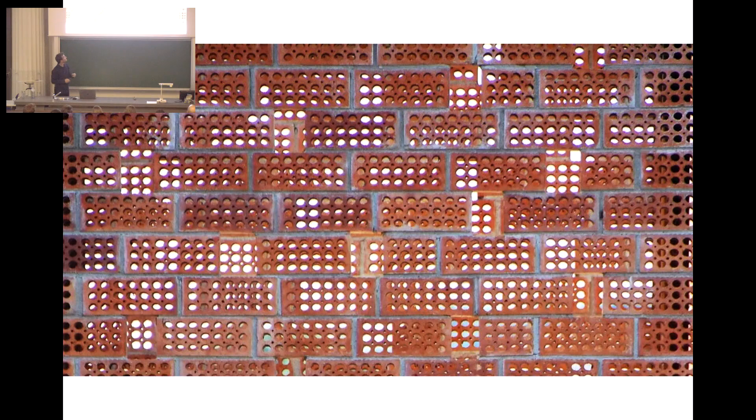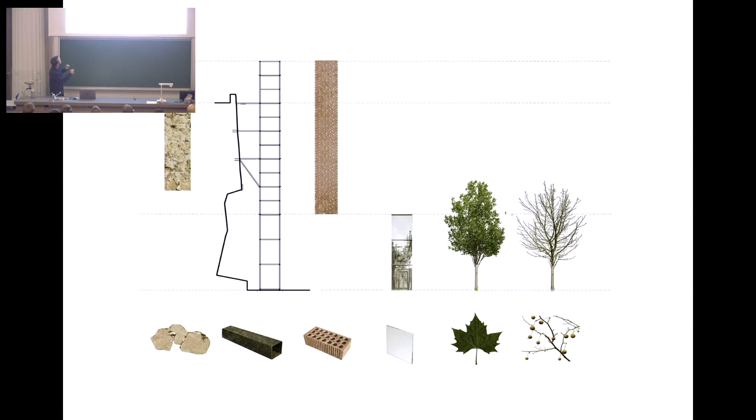This is the structure. Since we place this material, this is a very local, very easy, very cheap material. It allows wind through, so it doesn't have impact. So we could achieve a very thin structure, 8 centimeter structure, which is very light, and then of course glass in the bottom.

With all these materials, trees and also the rocks, we enclose these 3 facades, maintaining this idea of relation with the pre-existence. Then with very easy details, we construct this tower, this elevator. The first part, I think like most of the projects, is the same idea, combining prefabricated parts with artisanal parts.

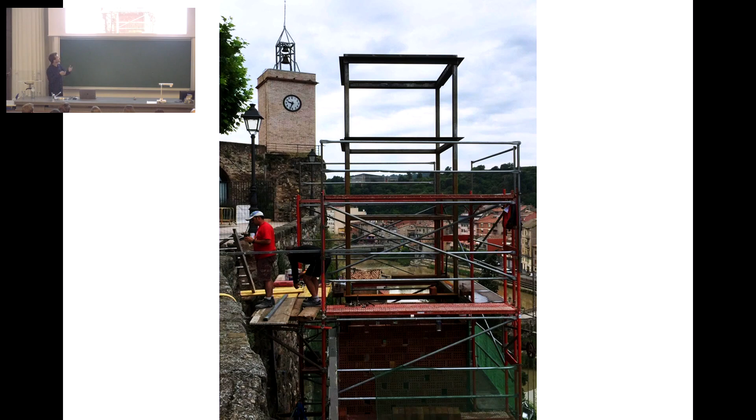So this is a prefabricated part, prefabricated logics, they did this in 2 or 3 days, and then started to put the bricks, and at this moment the people from Gironella, the inhabitants, asked me, when are you going to finish this tower?

And I said, it's already finished. This is like this, it's already finished. Oh, okay. They thought that we were going to paint it or to do something. No, it's already finished, and it's great because it's great from the first day until now. It doesn't need anything, any kind of maintenance, anything.

So with this idea of permeability, with this idea of having a transparent view from here, this kind of relation between the different tower and different material, and also understanding this tower as a party wall. Another party wall we have placed here creates a new public space. A new public space that worked and improved, it really improved, it achieved the main goal, which was to reconnect these two situations.

A proof of that is that after this commission, after this work, we had 2 more commissions in Gironella. The first commission was here, to improve all this place, which was horrible, a former horrible place. But the other commission was to improve a place uptown, in the old center. So for us, it's important that this elevator has achieved the idea of connecting these two situations and starting a recovery, social recovery of the 2 parts of the city.

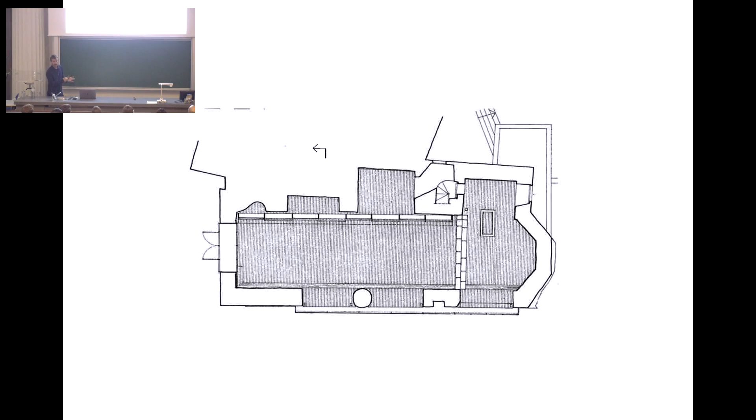the municipality of Catalonia did an intervention to replace a facade and to place a curtain wall here. And this place was like a storage room for the mayor of Gironella. It was a fantastic place, but was unused.

It had problems of accessibility, it had some stairs and didn't have any kind of service, no bathroom, so they couldn't use it for anything. The commission was to reuse this place with a very small budget, but to try to take advantage of everything, even this horrible curtain wall. We try to understand that this could be something else.

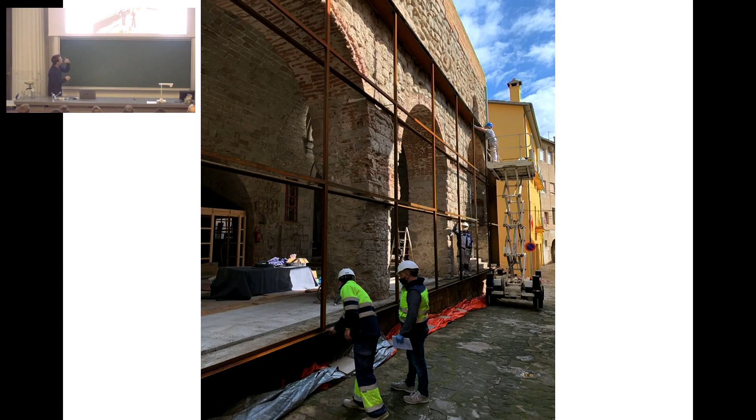So with this attitude, we uncovered everything. We took out, of course, all these storage things, etc. We took out all these translucent walls. We improved the structure. We did more columns, metal columns, in order to put good glass, transparent glass walls, and to improve climate conditions.

We did this project, but for us the project, again, is about the connection between the street, the public space, and the interior, the connection between the public space and the heritage, history and the future. From the street we can enjoy the heritage, the space, the activity, and from the activity we can enjoy the space and interact with the neighbors. This is the second facade of the house, of the church.

So the other project that we were commissioned after this project, I think it already changed a little bit the street and the surroundings. It's now accessible and has a lot of activities.

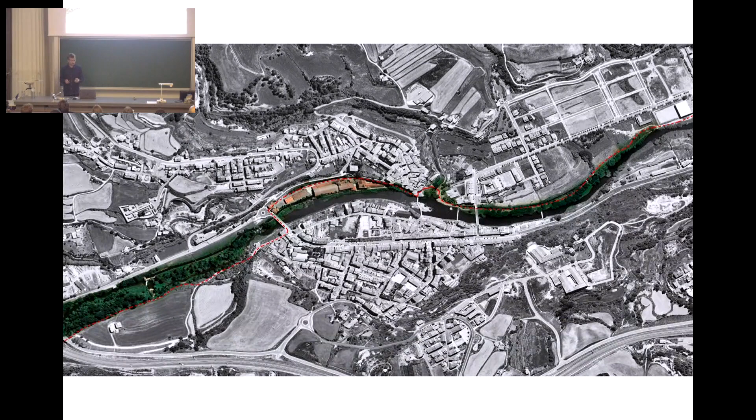The last project for tonight, the other project we were commissioned in Gironella, was the recovery of this path that connected the elevator with the old bridge. For that commission, we decided to work with reusing old stones, pavement, that were located in a municipality storage place. We placed them without any kind of joints, so we could let the water pass and the vegetation as well. And we decided to put all these banks here in order to allow this proximity between the inhabitants and the river.

Because as you remember, there was some kind of distance between the river and the people before. So with this idea of a light handrail, almost invisible, we transformed this place into this.

So this place is actually being rooted into Gironella's history. It's a place that changes with years, changes with seasons. It's an indeterminate space as well. People use it as different things. It facilitates the connection with water. It improves connection with the elevator. And the most important thing is that people have transformed this place into another thing, into another future.

Into another place, they have transformed a former residual place, a fantastic place that no one really cared about 10 years ago, into a place where they settled a festival, settled a new life, settled a lot of good things for the city.